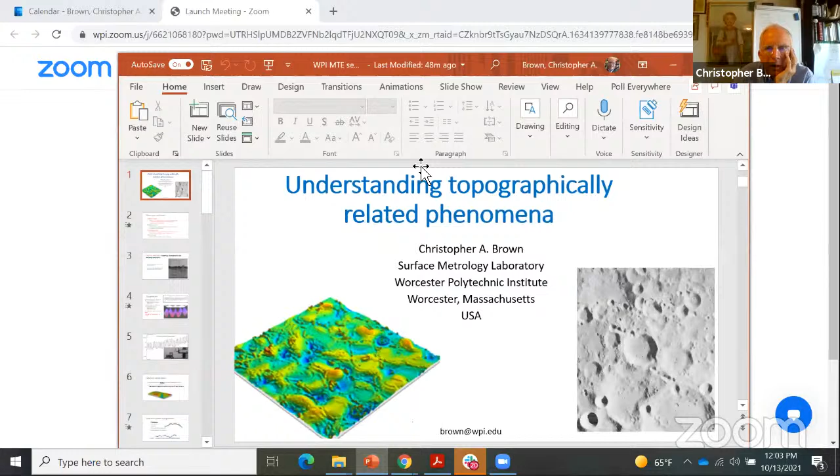All right, so now I've got to find out where my slides are. I just had them open. Where did they go? Here we go. All right, I'm getting it. Can you see my slides? Yes. Okay, good. You'd think I would have this down by now, wouldn't you? All right.

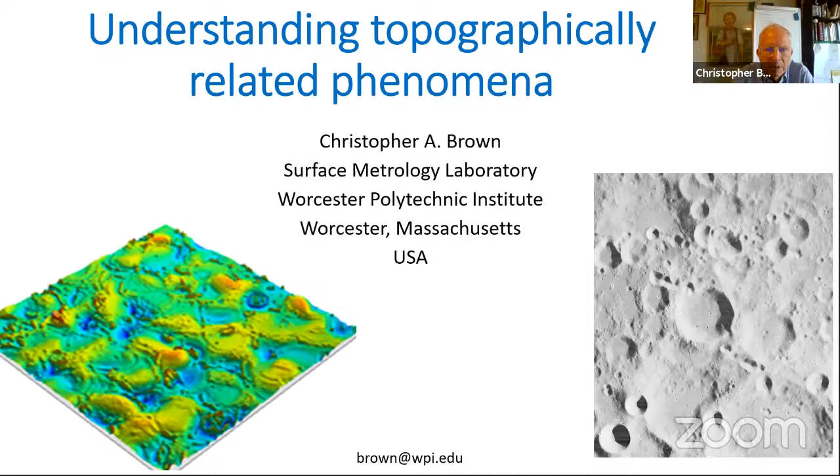So Maya did a great job of mentioning my other areas of interest, but I would especially like to note axiomatic design, because that was part of the inspiration for this work. Back around 1980, Nam Suh from MIT proposed two design axioms. Most people don't think there should be any rules for design. And he went to see what things might be in common for all good designs. Nam's first honorary doctorate is from WPI, so we've got some close ties with him.

I've been working recently more on engineering ethics, and it's disappointing to know how many people don't even know the first canon, which is shown here: hold paramount the safety, health, and welfare of the public. And so sustainability and revitalization come naturally from that. Had engineers held paramount the safety, health, and welfare of the public, our climate wouldn't be in the lousy shape it's in right now. We couldn't have gotten there without a lot of technology. Whether or not it's engineering, since it doesn't hold paramount the safety, health, and welfare of the public, is something that we need to discuss.

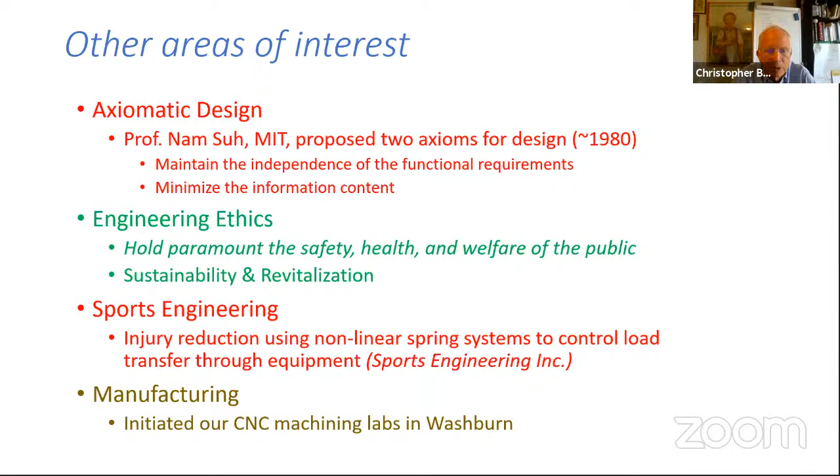Sports engineering, the main thrust has been injury reduction through nonlinear spring systems, and then manufacturing. And I was lucky to be around when the stars aligned and we were able to bring 21st century machine tools into the WPI manufacturing labs.

I was all excited about what we were doing with topographic research years ago, and I was having lunch with my advisor at a meeting in Paris. And I was talking about this, and he interrupted. He says, "What is a surface?" So, and what is a topography? And okay. So we need a definition.

So I've got here a cross section of a surface, aluminum with some oxide, and so this is in a TEM. So you have to put another layer on it. We did some of these in Lausanne. I couldn't dig up one of the ones we did though, in time for this.

But what we're looking at is a very thin region with high gradients in some physical property, which we can see here in the transmission electron micrograph of this thin film. I haven't had a chance to do any of these since I was in Switzerland, but doing this perpendicular to the surface at the surface is a chore, and we were able to do some of that.

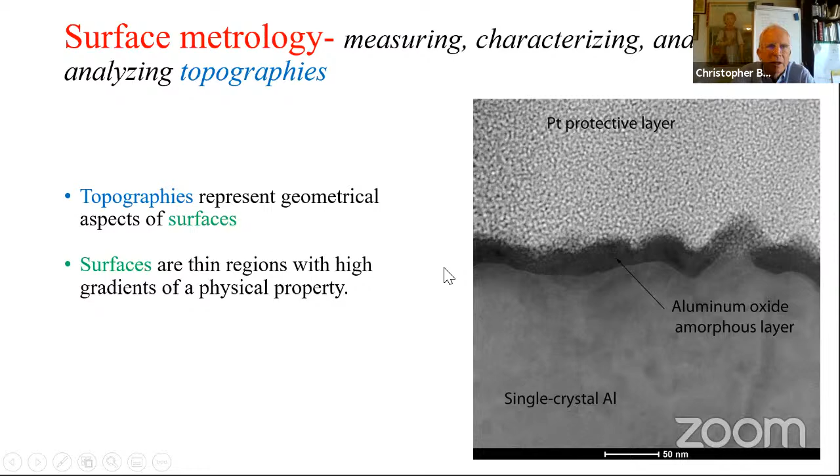But the topographies, okay, this is the geometrical aspect of the surface, and that's what we're going to be characterizing. So to talk about it at all, as Lord Kelvin pointed out, we need to be able to measure it and quantify it, and that's where it gets interesting. And we can only measure it by some interaction with a sensor. Lots of times you say, well, that's not the real surface. Then what is the real surface? If you can't measure it, I don't think we can talk about it.

But the way we usually measure it is heights as a function of position. Of course, now with CT scans, we're getting more than one height as a function of position, and reentrant, we're looking at voids, and it's getting more interesting, but that's a good subject for another day. So traditionally, most of the time we're looking at linear profiles, and that's still largely done in industry.

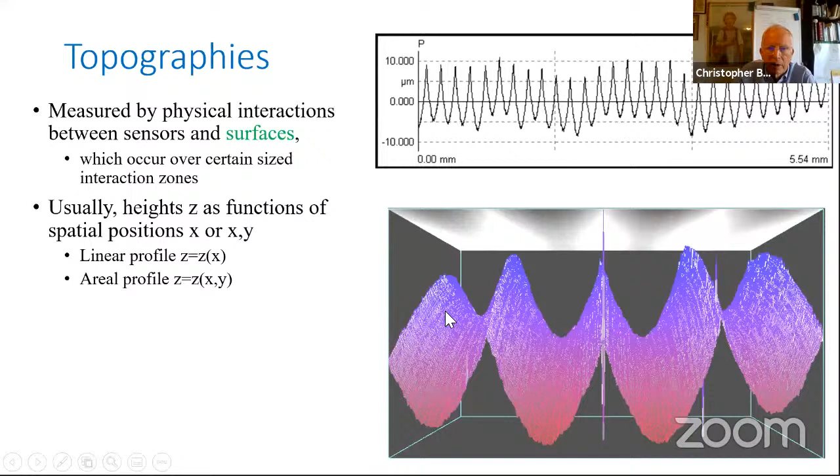And what we're looking at here is a turned surface, and we can see the cusps that result with each feed mark and each revolution. And then down below, we're looking at what we might call an areal profile that shows the surface in what metrologists call 3D and physicists like to call 2D. But anyway.

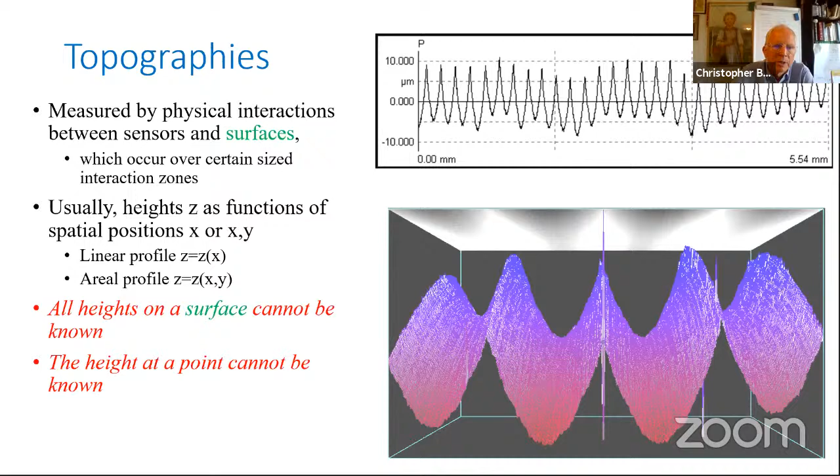But here's some things that we need to keep in mind sort of philosophically. We can't know all the heights on the surface. And we can't know the height at a point. A point is too small to measure. There's no reaction with a surface at a point. So we need to measure the height in some finite zone or region. And we move over and measure it again.

So the interesting thing, I think, that makes this particularly challenging and rich for investigation and study is the irregular components. And all surfaces tend to have irregular components at sufficiently fine scales. They're surfaces, so they should be continuous, but not always. The topographies don't have to be differentiable.

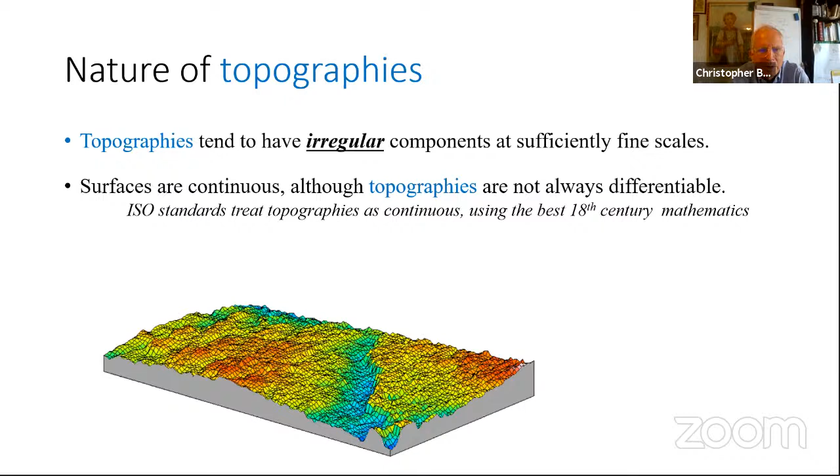But our ISO standards, that's International Standards Organization, for those of you who are used to WPI speak and think it means in search of, but the ISO standards treat the topographies as if they're continuous, using the very best 18th century mathematics. I'm starting to make some progress on the committees, and that may change. But so there's a little illustration of the kinds of irregularities that we see on surfaces.

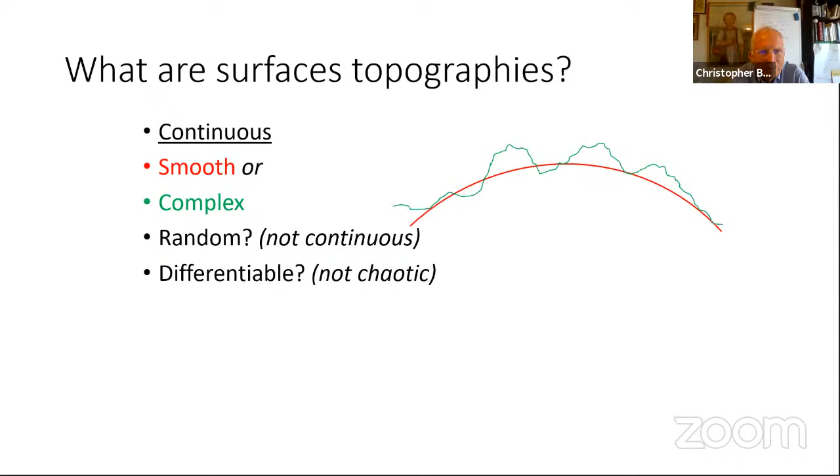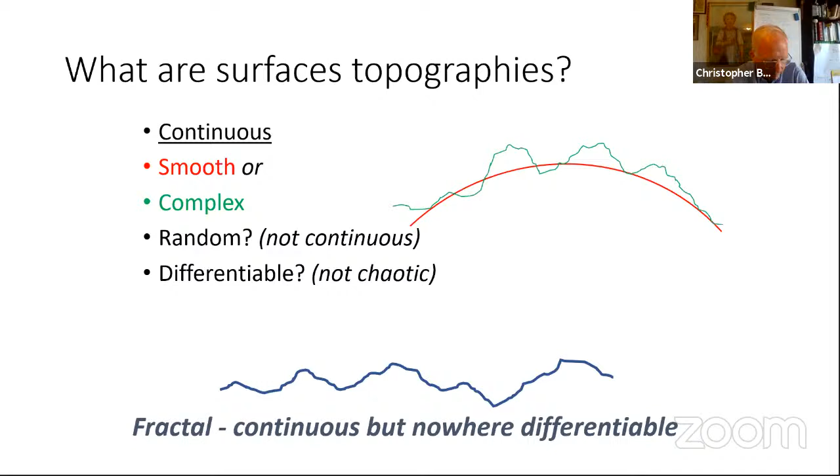So fractals was a model I started off with, continuous but nowhere differentiable. And that's a neat mathematical model, but we've stopped using that term and are dealing more now with irregularity. There are a lot of fractal purists who question whether or not it's appropriate to use fractals on this. So we've been calling it multi-scale geometric characterization is what we're doing.

But here's the interesting question, I think, for lots of things that we do, not just surface metrology, but lots of technical things that we do in engineering, particularly. Is it an experiential discipline or scientific discipline? So an experiential discipline, obviously based on experience, standards, best practices. And we've got a ton of standards for surface metrology and all kinds of people talking about best practices.

So certainly we're in there as an experiential discipline, but can we be a scientific discipline? And a scientific discipline is distinguished from experiential by having a few simple self-consistent laws or axioms. And these can be used to solve or understand a wide variety of problems. Understanding in the technical sense means being able to solve problems.

So the scientific disciplines exploit the compact nature of our universe. So it's much easier, for example, to describe things with a few scientific principles than lots of experience. And therefore, they are easier to learn and to apply. So axioms. We don't often deal with these. Euclid sort of took this on a little while ago dealing with mathematics. They're regarded as being established, accepted, self-evidently true.

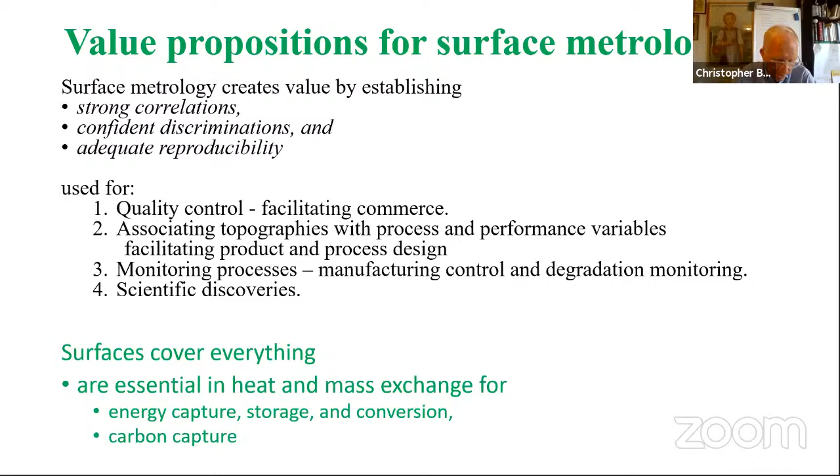Okay, surfaces cover everything. They are essential to heat and mass exchange for things like energy capture, storage and conversion, and for carbon capture. So they're quite relevant to the issues we're having currently with sustainability and revitalization. All right, on with it. Axioms. Axiom 1.

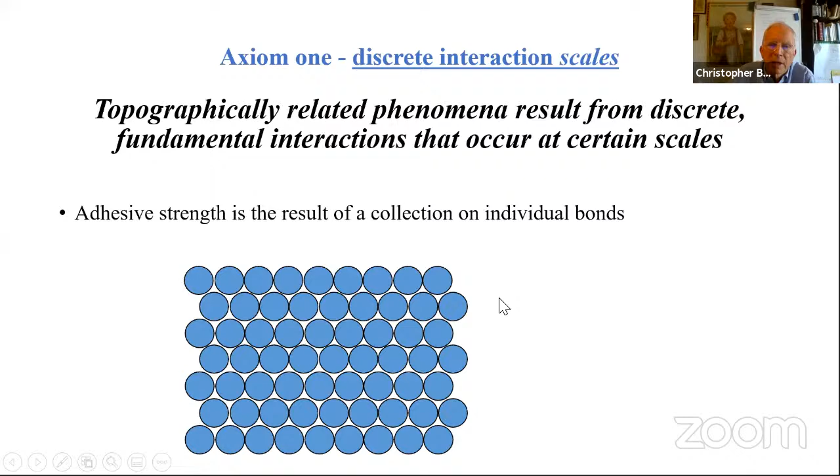Now, then there are naturers. Naturers should be without the R, sorry. Natures of the discrete interaction. I'm terrible at proofreading. All right.

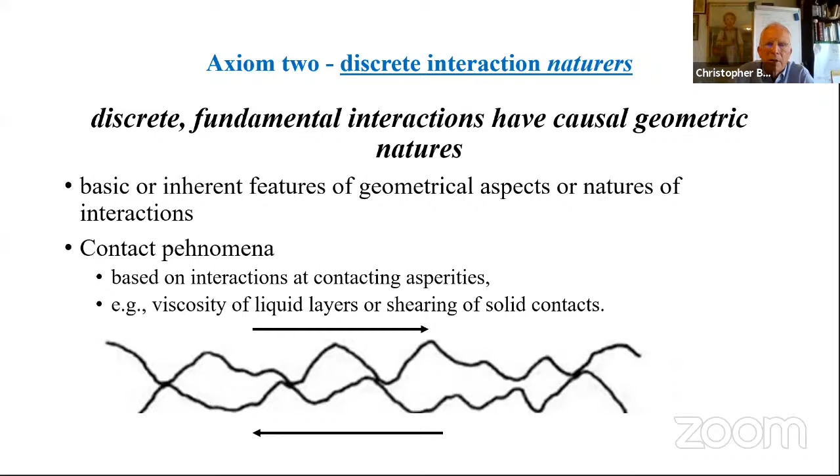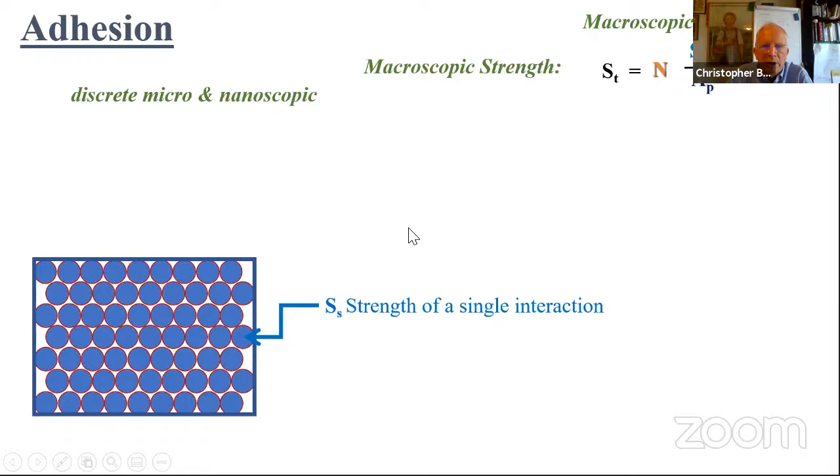All right. So just to get back to this discrete interaction and the nature. So if we're looking at adhesion, which was one of my early things on this, we've got macroscopic strength is equal to totaling the strength of individual bonds here by some number, individual bond strength, and then dividing by the overall area. So we get the strength of a single interaction, total projected area. And then how many single interactions do we have? Well, that depends upon how much area we have at the scale of the interaction. So one of these interactions indicates what the scale is, and that's to the axiom 1, and the nature of the interaction is the strength.

So then, all right, I was distracted by the poll, sorry. Want to make sure everybody's here.

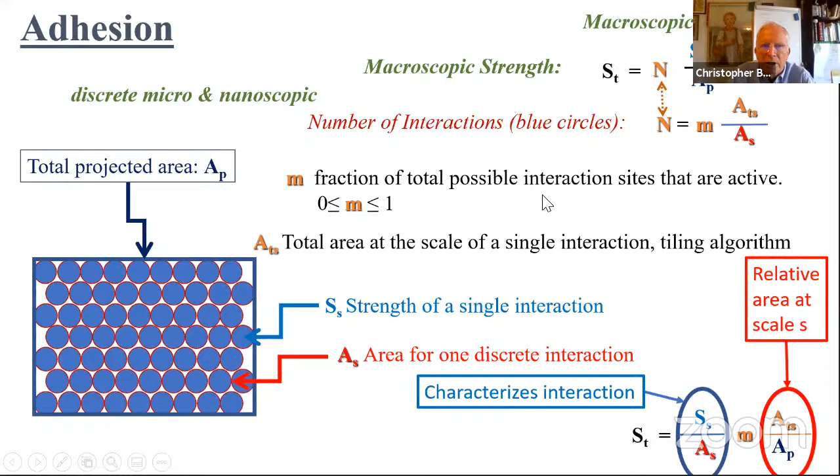Okay, and so but they might not all be active. Maybe they're in too steep a valley or something, or there's some contamination, or the chemistry isn't right there. So we've got a fudge factor that will be less than 1. And then so we total up the area. And what we end up with is the overall strength of the interaction, substituting and rearranging, is the strength of a single interaction divided by the area of the single interaction. So that is the interaction. That is the nature. That was the axiom 2. And this is taking care of the scale. And that was axiom 1. So there's a model for adhesive strength. Not the axioms, it's more the axioms were based on that than that was based on the axioms.

So we developed this way of determining the relative area. The area at some particular scale is a ratio to the projected or nominal apparent area. And we got a patent on that with some students at WPI, and now it's in the national and international standards. Actually has been for quite a while. And it is marketed by Digital Surf as a module you can get from MountainsMap. And they actually support the lab with a gift whenever they sell one.

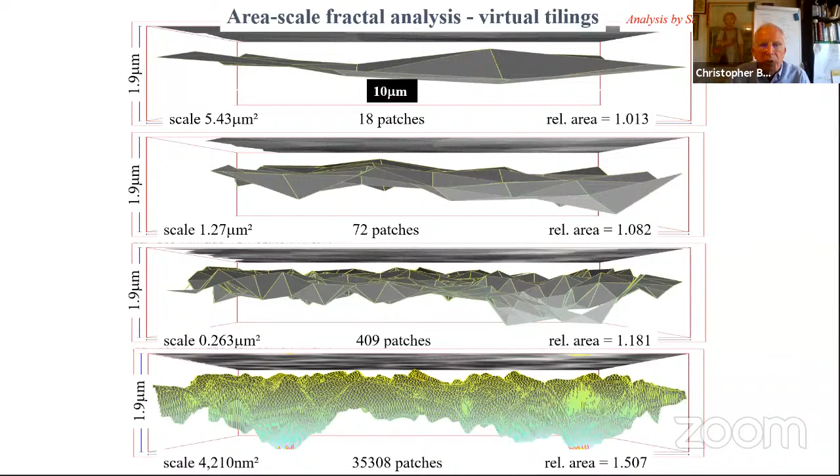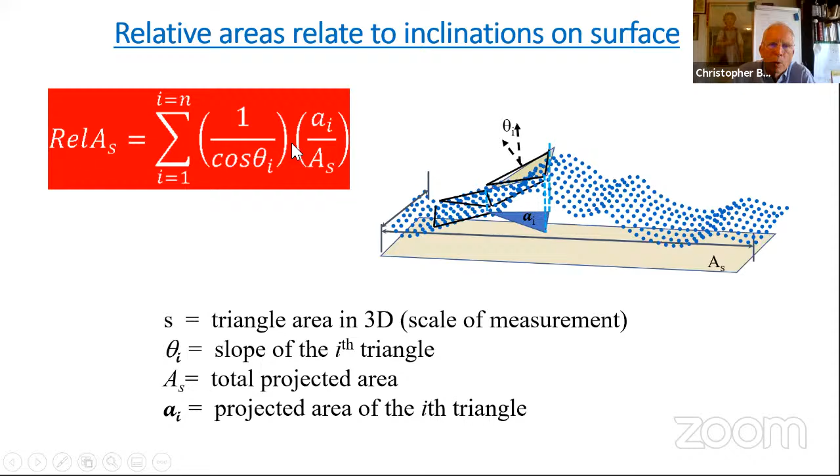And now, one of the interesting things about the relative area is that it can be related to the inclinations on the surface. So we're looking at surface slopes, or a spatial derivative of the heights. And so we have this little tiling exercise we have in the algorithm, and the alignment wasn't maintained too well through copying these things over, but there it is. But anyway, so we have the projected area, and that's a little derivation to show us that the relative area is related to the slope here, 1 over the cosine of theta. And it's a special kind of weighted average. As this gets very steep, it has more weight.

So we could look here, I've forgotten what this surface is, but I use this for illustration. And you can see it's got some quite jagged features on it. And the average inclination at a very fine scale is quite steep. And then as we get to larger scales, the average inclination declines quite a bit. So this is generally true. When an ant walks down the sidewalk, the ant is climbing over cliffs and things that we can just ignore as we walk down the sidewalk with our big feet.

So corollaries, measurements. So the measurement resolution, because we can't talk about the topography unless we measure it, as we established. So we have to include the discrete interaction scales, and then meaningful samples of the topographic features where these interactions are occurring. And in general, we don't know what those scales of interaction are, and often part of the objective of our work may be to determine what those scales of interaction are. So we use multi-scale characterizations and analyses to test for the fundamental scales, and I'll show you some examples of that.

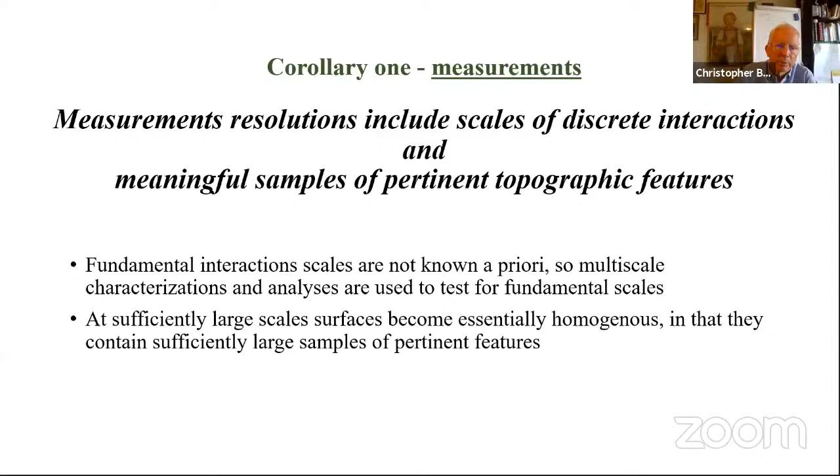So anyway, here's an example of the traditional way of measuring things. It's a contact stylus profiler where I was able to find the trace I left in the SEM. This is difficult to find in a scanning electron microscope, but it was neat in Switzerland.

We had all the time, and back in those days, all the Polaroid film we wanted. The Swiss do a nice job of supporting their technical schools.

So what's the scale here of interaction? Well, it's based on how the tip is engaging, and it samples the heights more than the valleys. And people go, oh, well, that's not a real representation. It is. And for contact mechanics, that might be just what you want to measure. And this is widely used, particularly in things like the auto industry, because the contact mechanics will probably be more severe than what we're looking at here. And this gives a good representation.

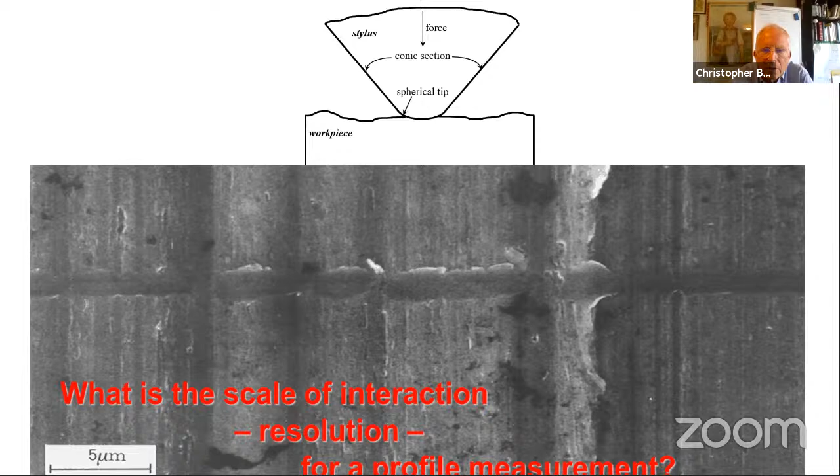And it is the kind of measurement that, well, anyway, internal combustion engines were developed with that kind of measurement. Now, if we take a closer look at the measurement, we can't measure the height at a point. So the instrument samples some sort of region, and we tend to think, oh, a light instrument, that's going to be much better. Light interacts with the surface in different kinds of ways. Sometimes it's reflected, sometimes it's absorbed.

And when I try to measure with light, I'm using confocal or interferometric or focus variation. All three modes are available on the Sensofar in our lab. Or maybe some sort of reflectance, and that's available on the GelSight that we just got. But there's a lot of software to interpret the way the light's coming off the surface for the different measurement modes, and that's usually proprietary software. So don't make the mistake of thinking, oh, it's light, so it's better than the stylus. It depends upon what you're doing.

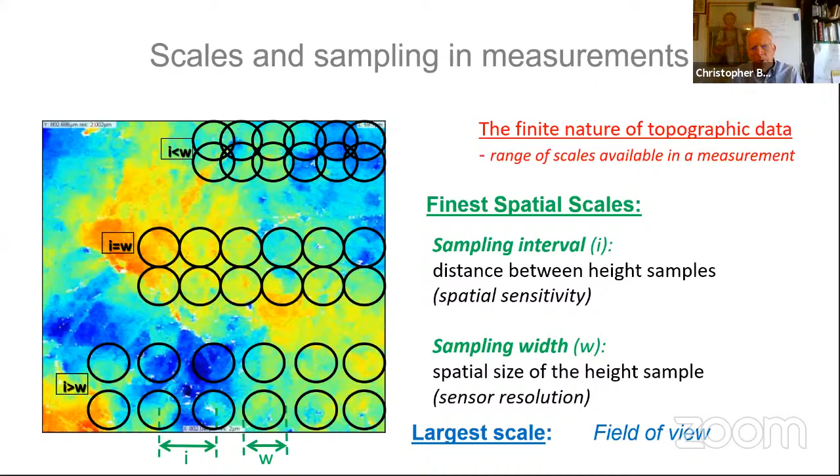But in any event, we can see the interactions here, three possible interactions between the sampling interval, which is I sample a height and move over and sample it again, and the sampling width, and then how big a region did I measure. This is actually some special French paper from the art museum that we measured for them.

Anyway, corollary 2, statistics. So we want the appropriate kind of statistical characterization, because there's different things. For example, if we're looking at crack initiation, like fracture and fatigue, it's going to be extreme values and the variance. But if we're looking at friction or adhesion, it's probably going to be average. So use the right kind of statistics, and that's corollary 2.

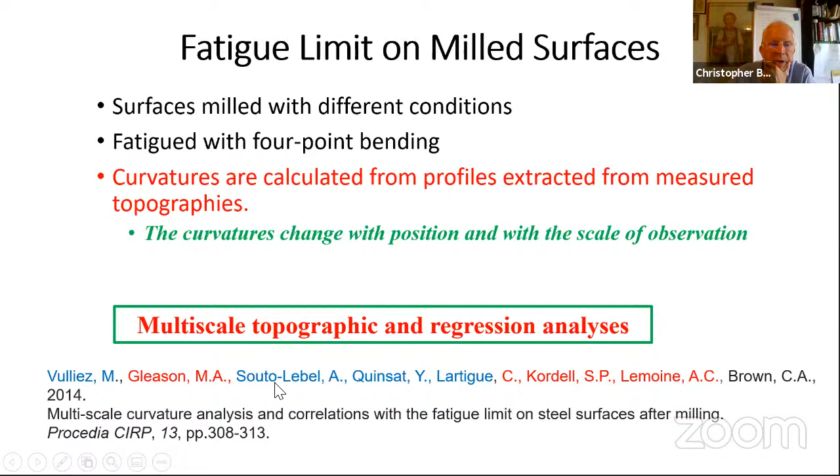So here's an example. This was a collaboration with ENS, what was then Cachan, and is now Paris-Saclay in France. Margot Vulliez came over and worked with us one summer. She was a graduate student there. The names in red are undergraduate students from WPI that all collaborated on this. These are two professors from Cachan, Saclay now. And then this was one of their graduate students who did all the hard work of breaking all these things in fatigue, which is a lot.

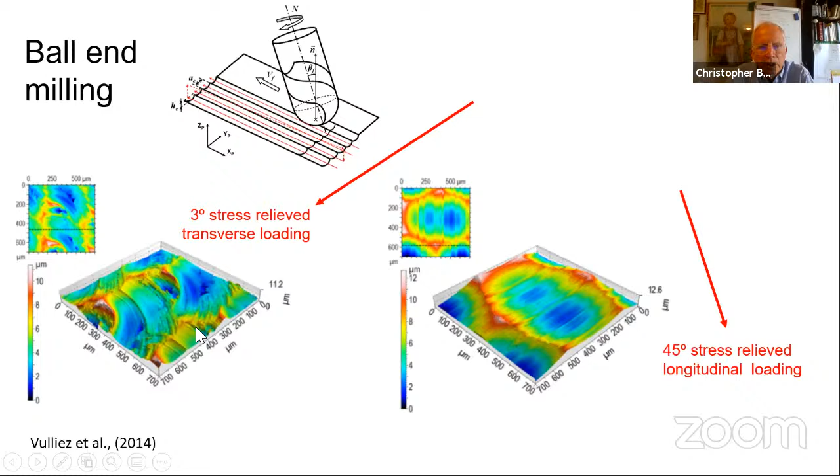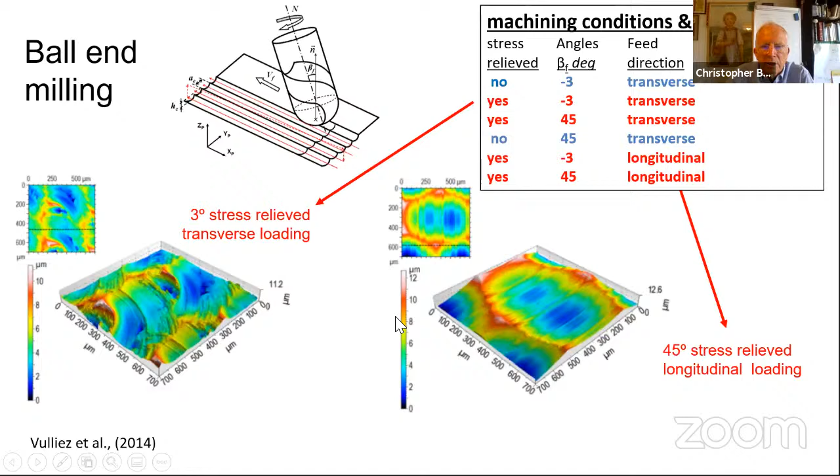Anyway, this was looking at the correlation strength as a function of scale. So very quickly, the surface was milled a couple different ways and directions, and then some of this was stress relieved and some wasn't. And so a number of different surfaces were created, and we can see there's renderings of a couple of measurements colored by height, so we can see the differences in the surfaces.

So we developed, and this was largely Matt Gleason's work, this method according to Heron. I just realized this is the first citation I have after the birth of Christ.

The fatigue tests, of course, are extremely fatiguing. That's why we use the same word.

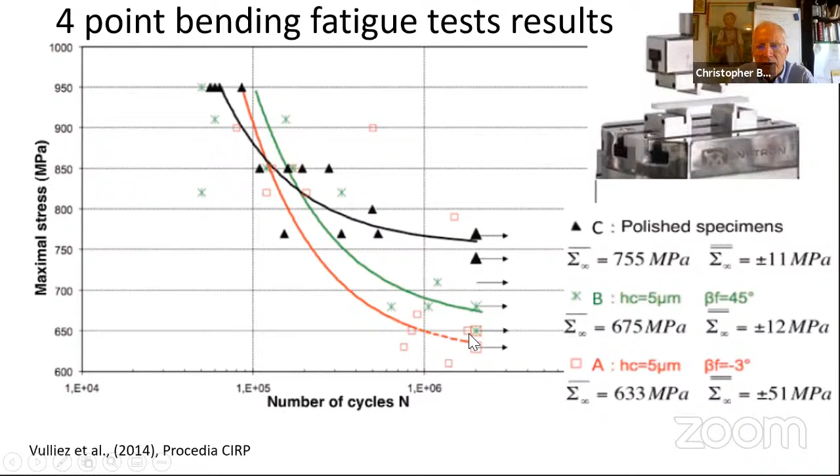And so to find the fatigue limits, you got to break a lot of stuff. As the stress goes down, the number of cycles go up, and then you figure out where the fatigue limit is. And then we looked for correlations between, now these are different statistical treatments of the curvature, because the curvature varies with position and then with scale. So here's the scale over here. And here's how at that scale, we're taking care of the statistics.

So maximum curvature, the mean of the 10 maximum curvatures. So we're trying to get a little bit more of a blend in there. Then we've got mean curvature plus standard deviation of the curvatures. And every time we're trying this, we're thinking, all right, that's pretty good. If we look at the literature, we don't find anybody else in this kind of experiment that's getting R squareds of 0.76.

So we should have said, well, all right, we're pretty happy. Maybe we should take the rest of the summer and go canoeing and hiking. But we thought we could do better. And then we did. And so here is the blend of statistics that got us there. Exactly why, and could we have predicted this before we started? I don't know. But anyway, this gives us an R squared of 0.96. Looks like we cheated. And there it's attached to a certain scale.

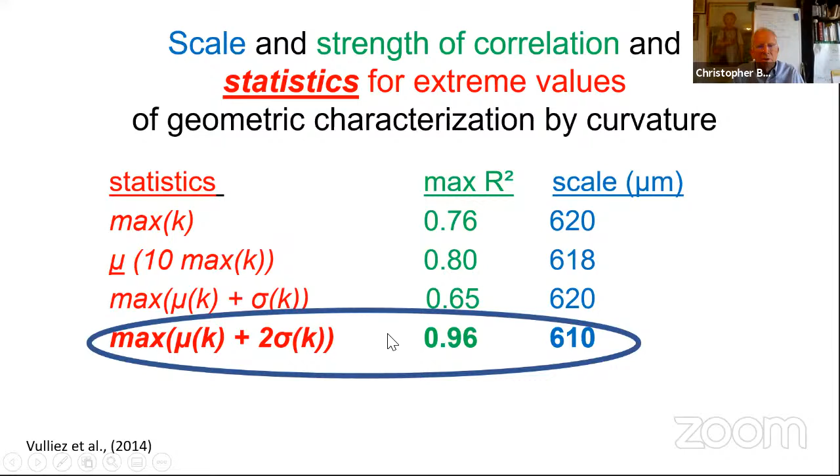And here's the R squared, the correlation coefficient. So we did a lot of these correlations at different scales.

And then I wonder if this thing can move someplace. I hope that wasn't in everybody's way. All right, so it wants to be over there or something. Anyway,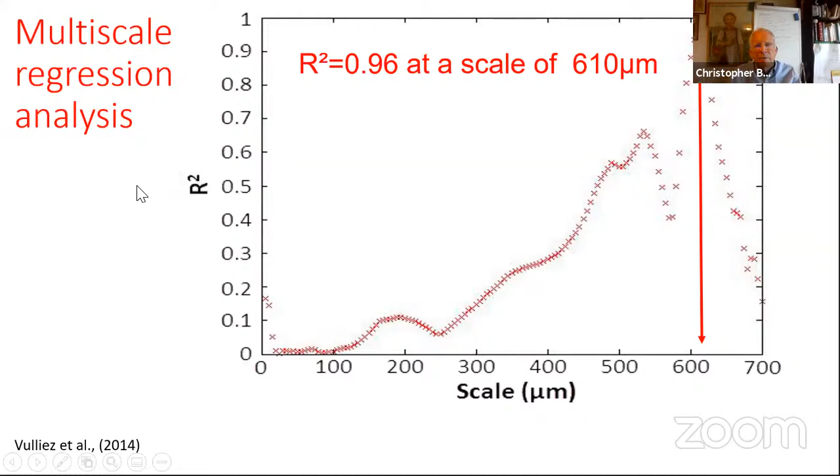So if you're not using multi-scale and you have not included that scale in your analysis, you might conclude that topography isn't that important in this. And so you have to look at the scales. So there it is.

So here's another example. Actually, I just submitted a revision of the paper, and we'll have to wait and see if they were happy with that. So friction on snow and ice, and that's been one of my favorite things because I was doing sports before I was doing engineering. It was essentially sports that got me into engineering. And so the ski snow friction is quite interesting.

And Sam Colbeck, who was at the U.S. Army Cold Regions Research and Engineering Laboratory up by Hanover, New Hampshire, near Dartmouth College, was one of the experts and has written a treatise on this, and I was fortunate to have had lots of discussions with him about this. And so his sort of theory was that you build up a liquid layer between the ski and the snow.

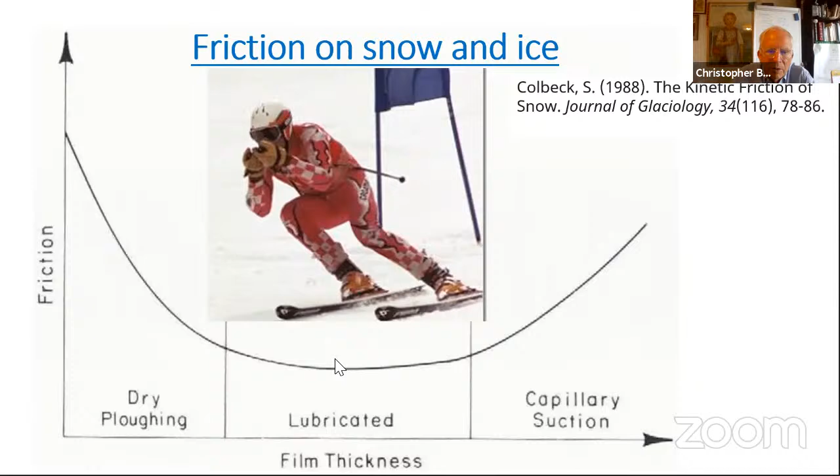And if there's not enough, you get this dry plowing, so the friction's a little bit high. If you get too much, you start getting capillary adhesion or capillary suction, like the same sort of action that makes wet clothes stick to you. But if it's just right, sort of Goldilocks, we get the lowest friction coefficient. So somehow we want to prepare our skis.

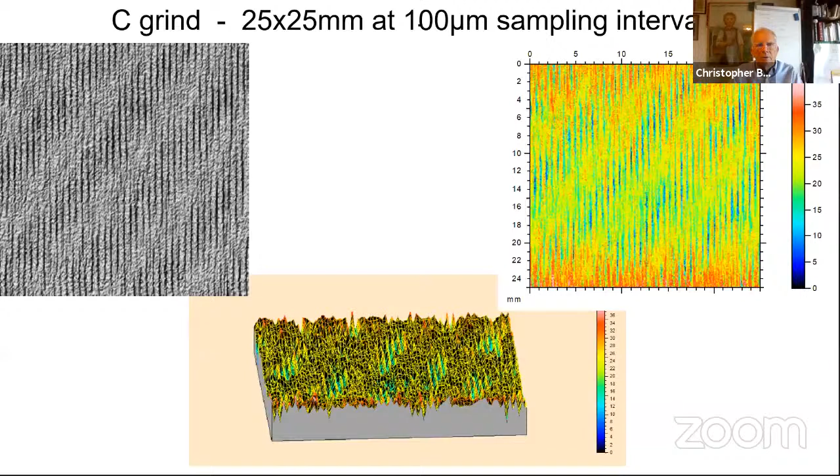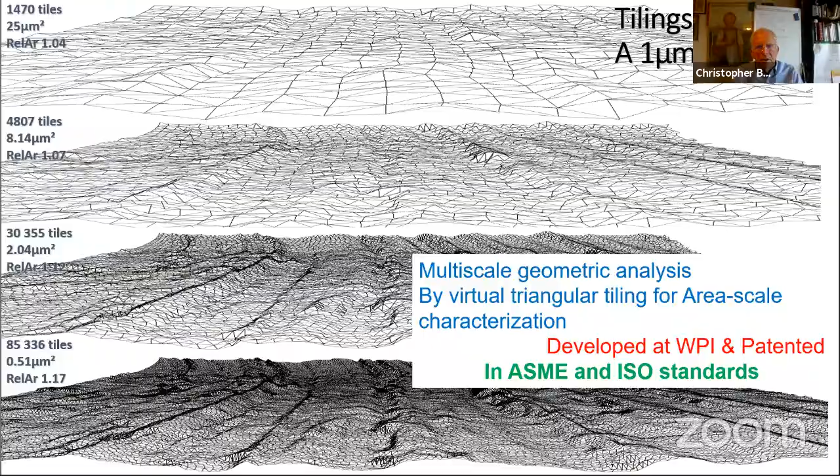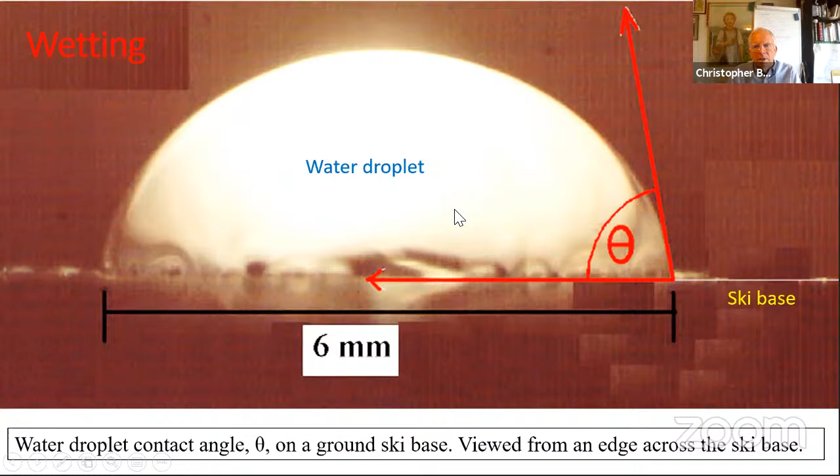But then once you get away from that, the surface tension and gravity take over for the shape and smooth it out. Because all of these little things here make for more surface energy trying to maintain those, and the droplets, of course, want to be roundish to minimize the surface energy.

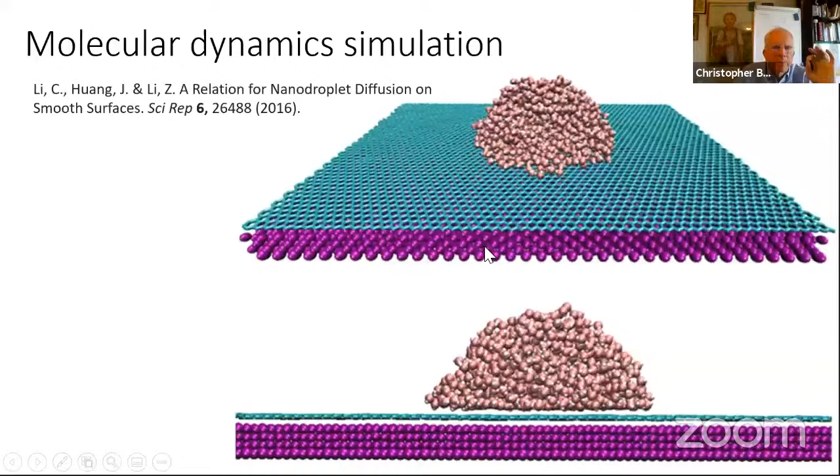As well. So we've done some wetting work at WPI, and this was in conjunction with the Center for Advanced Research in Drying, or CARD, and this was sort of directed by Professor Daniello, and I'm just tagging along. And I've presented some of this before, but now we have another context for this. And so here we're doing multi-scale geometric analysis.

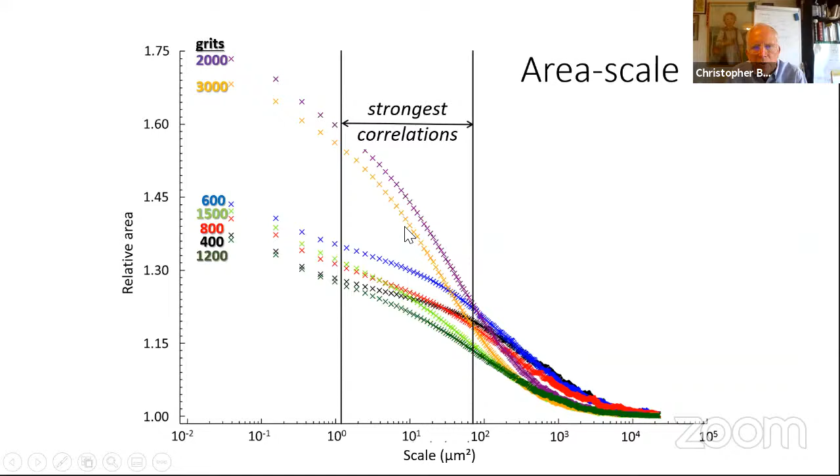Anyway, so this is how the relative area is changing with respect to scale. So the smallest relative area you can have is 1. And in this case, 1.75 is really a pretty big relative area for a lot of engineering surfaces. So here we're looking at the complexity. So the complexity is essentially the slope of the area-scale curve. So this is the area-scale. So if we look at the slopes, we take the slope over a certain little scale range, about a decade, but we can do it in a sliding fashion. So we get a continuous thing here. It's related to the fractal dimension.

But anyway, so here is the region where we're getting the strongest correlations. And so when we look at the ranking of the grits in this region of strongest correlations, it ranks perfectly. So the 400 are the biggest grits and the 3,000 are the finest. And so there's kind of a thing here, because when we first presented this, we just had the grits with the colors off in the corner. And I don't like presenting it that way, but I didn't have time to fix it. And so for this, I started fixing it. And I noticed that, look at that. These things that were sort of a mess before in this region of strongest correlation rank perfectly.

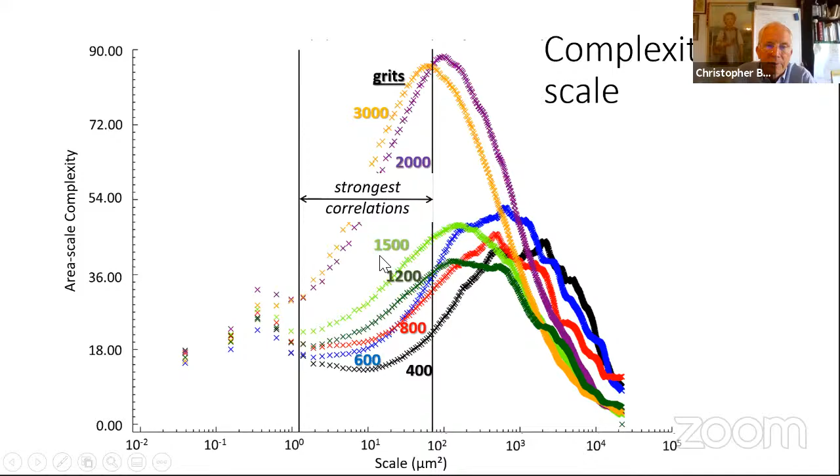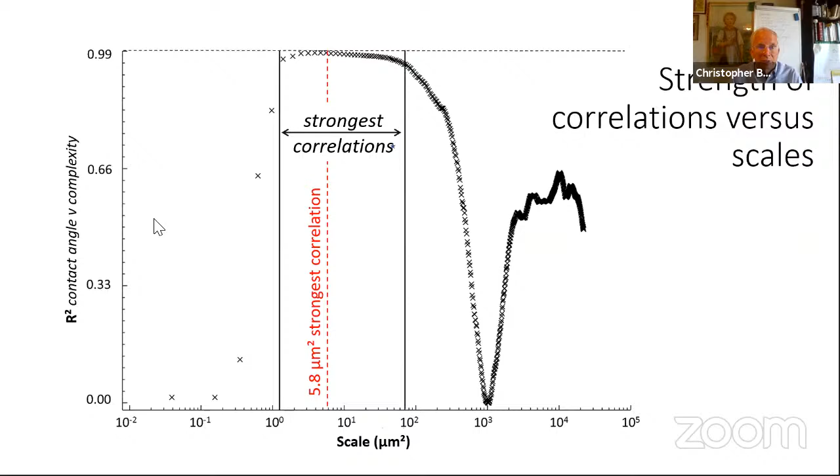And so here is a scale range, and the highest is at 5.8 micrometers squared. So on this surface, for these things, this is the scale of the interaction. And the nature of that interaction is trying to find an angle. And that's, anyway, so there we are.

So to summarize, here we have a topography that we want to study. And so there's something that was done to prepare it. So here it was the ski base preparation. And then we have some sort of preparation scale or processing scale. So this might be like a manufacturing process, but it also could be wear. It could be artistic, it could be painting, it could be micro dental wear on the teeth of animals that we can analyze and tell what they were eating.

Anyway, so there's the processing scale, then the performance scale. Here we're looking at friction because it was the ski bases. There's the topography. We measure it, as we saw, at certain scales, and as we do the measuring, we get the measured data, and then we get analysis scales and statistics here.

And we talk about the first kind, to prepare the surface, and the second kind for the performance. And so the topography goes from the dependent variable in the first kind to the independent variable in the second kind. And so those are the regression analyses and discrimination tests, or the statistical stuff.

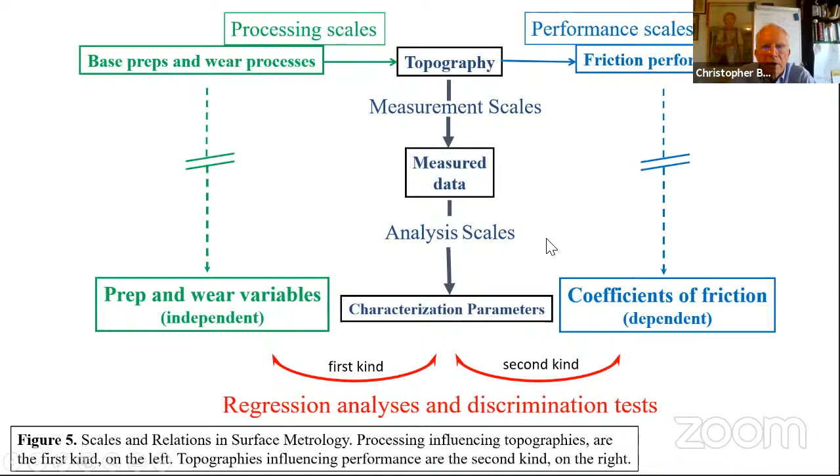So in summary, I've proposed some principles trying to capture the compact nature of topographically related phenomena. So we have this idea that there are discrete fundamental interactions at a certain scale with a certain character or nature. And to understand these, we have to measure appropriately and use the right kind of statistics. And of course, we have to characterize the right scale and the right nature or character.

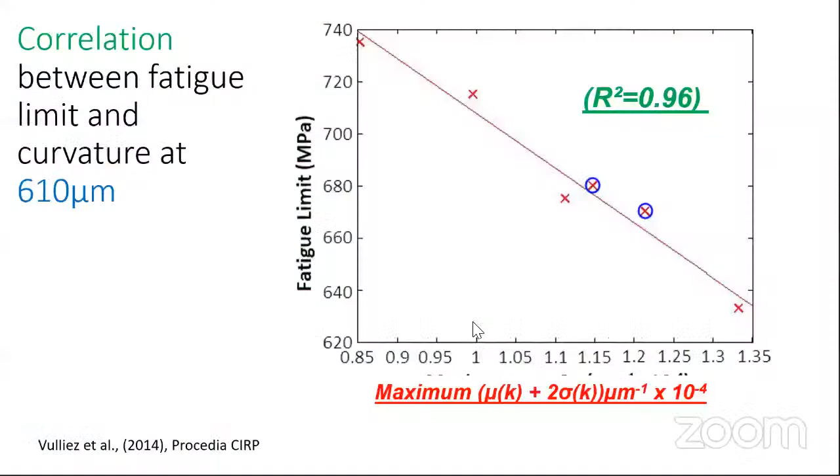Hi, Professor. Oh, go ahead. Yeah, Jason. So just a quick question. Remember the graphs you showed before of surface roughness as a function of position and length scale. So I was wondering, on the length scale axis, how do you determine the position? Is that at the center of the window, or on the left edge of the window, or the right edge?

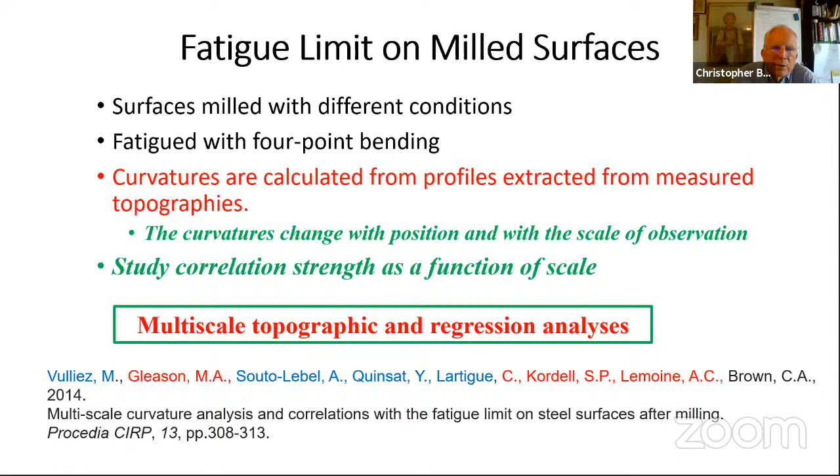Yeah, good question. So we choose 3 points that are equally spaced horizontally. There are other ways of doing it, and there are some cautions with this. So when we look at these, the window here is extending from one side of this to the other, basically. And here the windows are smaller and sliding over it. Does that answer your question?

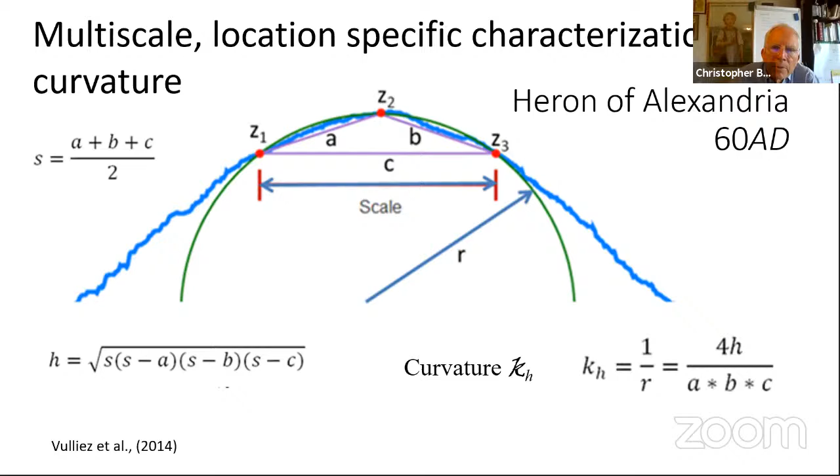Yeah, sort of. So what about maybe 3/4 or almost to the end, where you have 4 or 5 windows? Would it be the centers of those windows? Oh, yes, right. The position that we're recording there is the center. So that would be the spatial position of Z2 as I'm showing it here. Okay. And so the problem is, as you move it side to side, Z1 and Z3 tend to fall off the side of the surface. So that limits what you can do. Okay.

So if you needed more data at that scale or more curvatures, you just have to do a bigger measurement, and you can stitch measurements together now, and that's actually quite easy to do on the Sensofar, and it's very fast.

I have a question for you. First, sorry that the poll distracted you for a moment there, but you mentioned fractal dimension a couple of times, and I wonder if there are properties or macroscopic behaviors that correlate better with fractal dimension than with some of the other metrics that you talked about, the curvatures and other things.

We looked hard for that. That was sort of the theory, because I started on this in the 80s, and at that time, when you did a computerized search for the term fractal, you could actually order all the papers. And then that went crazy. I've stopped following it. But we were certainly hopeful that the fractal dimension was going to correlate with something. The one time that we saw that was on cracks in ceramics in a Canadian nuclear power reactor. That's the only time, but the fractal networks make sense.